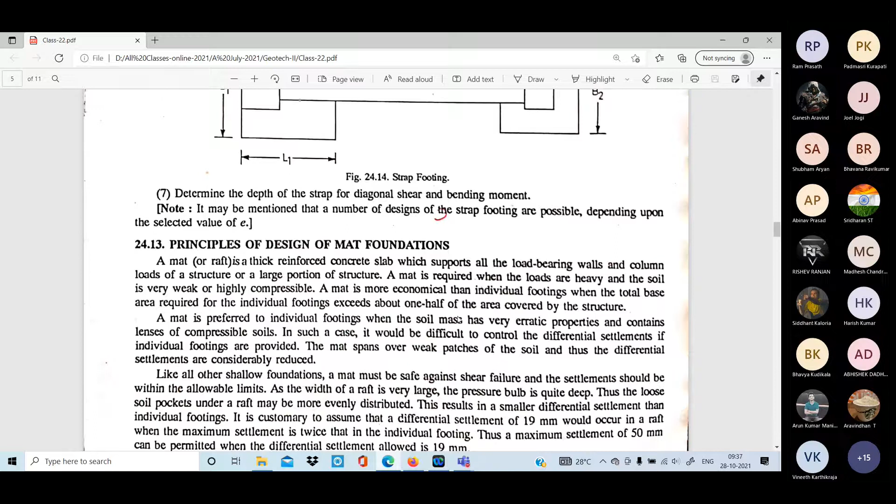So if you recall, we have seen this particular strap footing, where strap would be there. So now we'll focus on mat foundation.

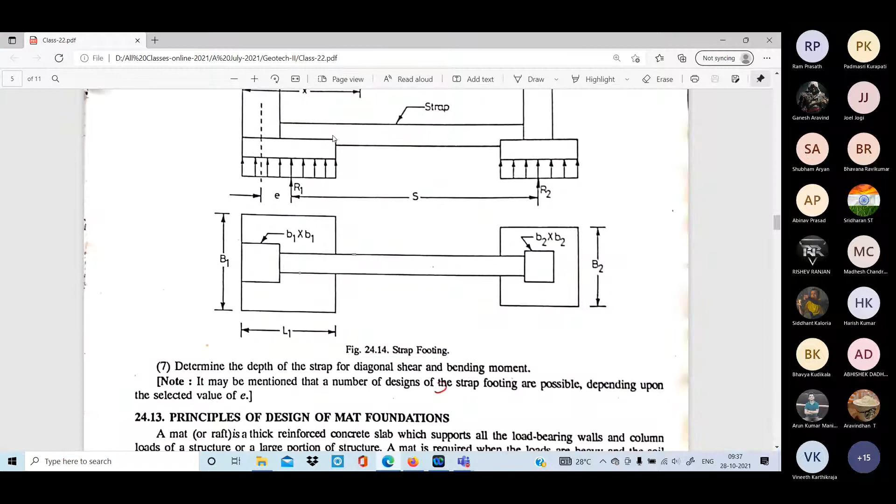Mat foundation actually. So when we have to go for mat foundation, there are some principles given here. I will not read it out, I will tell you what this paragraph is all about.

Generally, raft foundation we will prefer if the soil is soft. But soft up to what depth? If it is a very long depth, then we have to go for pile foundation.

If the soil is soft for a lesser depth, what we'll do is we'll remove that soil fully and we'll fill with the mat. So whatever soil we have removed, the weight of the soil or pressure would be compensated by the raft foundation, the mat what we provide.

So the increase in stress, net increase would be zero only, because what we are doing is we are replacing the soil with the mat. This is the criteria and it is very famous, people have started using it because net stress would be zero at the bottom of this raft.

One more criteria is if you provide individual footings, and the area of the individual footing is more than 50% of the whole area - suppose we have some area, whole area, some 100 meter square - and when you try to provide this footing, if individual footing crosses more than 50% of 100 meter square, then code says it is better instead of providing these footings at a lesser distance, better to go for a full raft foundation.

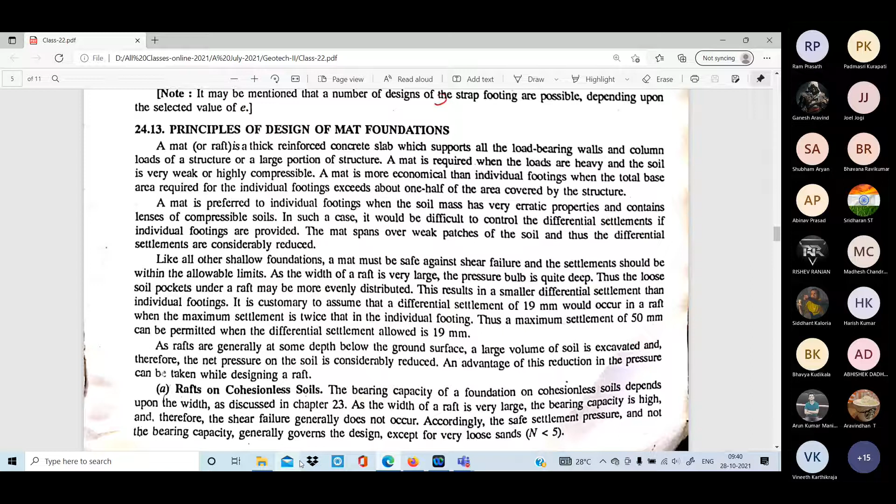That's what is given in this paragraph - what is the raft and other things. Now, like if you see...

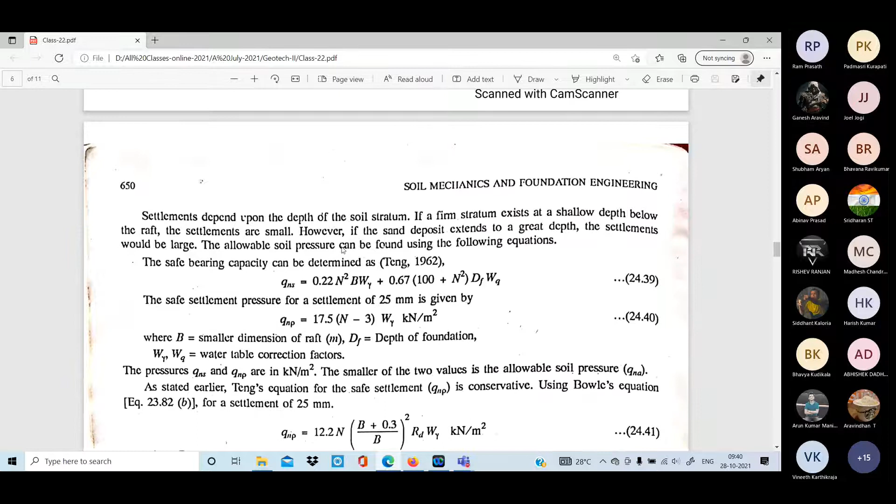How to calculate this particular bearing capacity of raft and other things, that is already like we have seen previously - here also they have given formulas by Terzaghi and many other people. Those formulas are based on the N values.

So as I said, this particular N is very famous - N value, number of blows. Once you get N, there are so many things you can do. We can calculate the bearing capacity, you can calculate the settlement, and many other things. It depends on the C's and other things.

When you do MTech in geotechnical engineering, whatever you are seeing - these people have their own theory, Meyerhof and Terzaghi and other people have theirs, and Bowles, especially Bowles, also a very big scientist.

Now what is the principle if the raft is on a cohesionless soil - the bearing capacity of a foundation on cohesionless soil depends on the width of the foundation. So if you recall our formula, Terzaghi's formula with C, N, gamma, DF and other things, for cohesionless soil this B term would be there. So more is the B, more is the bearing capacity.

Understood? It's just common sense - that means if the width of the foundation is more, you will get more bearing capacity, it will bear more load. This is only for cohesionless soil, not cohesive soil.

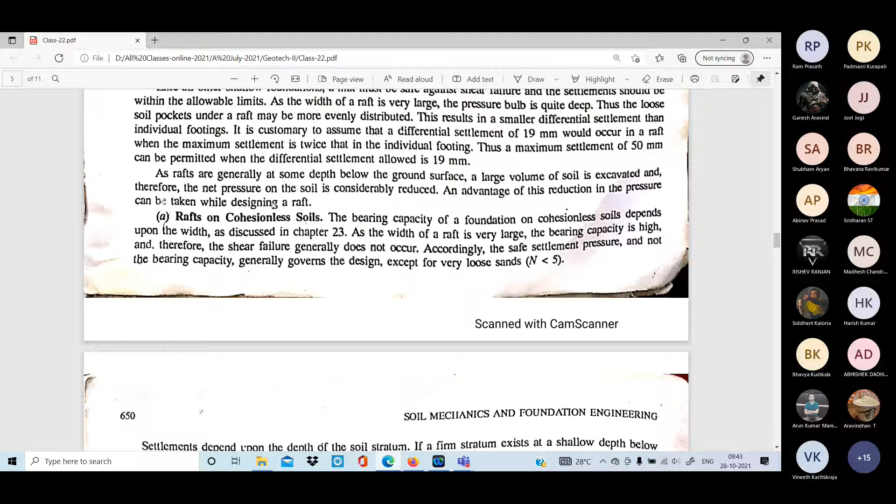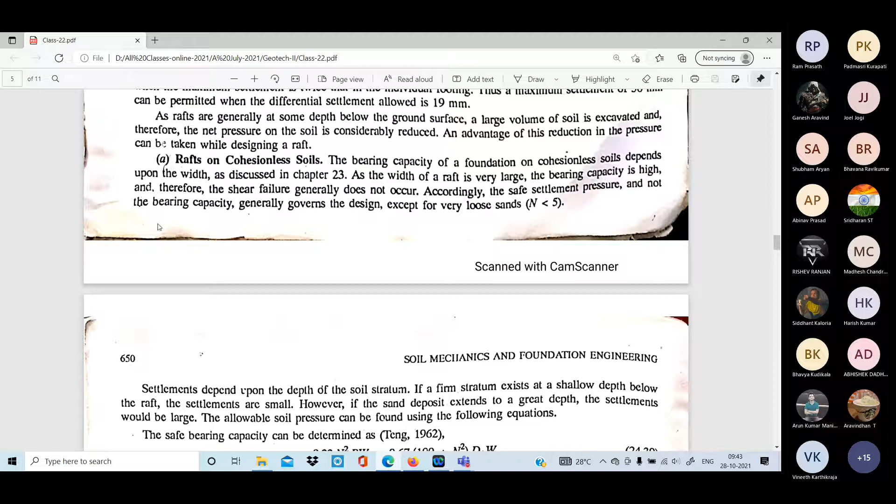Then what is given is, according to the settlement pressure here - I'm showing directly from the book so that you will understand what it actually is.

The safe bearing capacity is determined - this Teng, 1962, has given this formula. Here everything is known: Wgamma, Wq is our water table factor, which we already know. B we know, N we know. So by using this, we can find out the net safe bearing capacity, or the safe settlement pressure for a settlement of 25mm, also can be carried out by this formula: 17.5N minus 3, and so on.

Again, what they have done is - these Wgamma, W, all these are the water table correction factors, which we already know. So here what we are doing is calculating the safe bearing capacity, and also calculating the settlement. Generally we take the lesser value of the two, because sometimes if the soil is settling down, the bearing capacity may be high, but settlement may also be high.

In that case, what we'll do is the pressures QNS and QNP are in kilonewton per meter square. The smaller of the two values is the allowable soil pressure. So the governing criteria for our bearing capacity is one of settlement, one of bearing capacity - the shear failure.

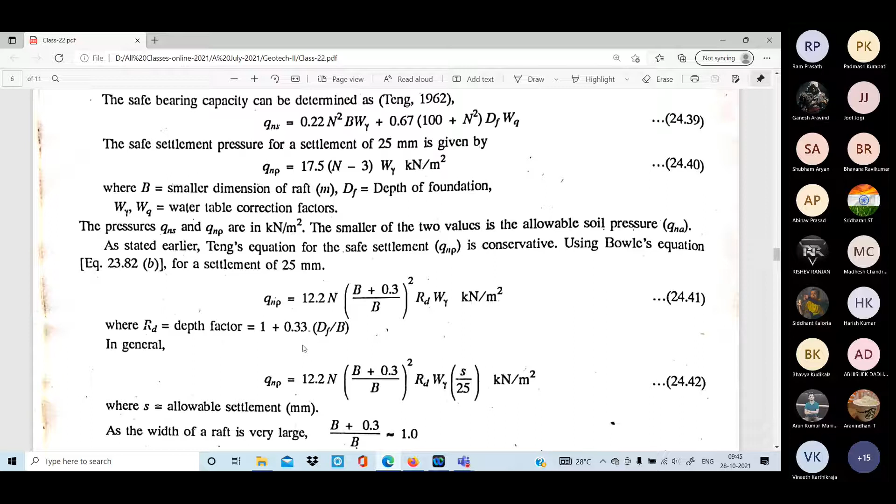Likewise, what we can do is slowly reduce this, and it will become like this. And what it says is, as the width of the raft is very large, because the pressure bulb that forms would be very large, then we say this B plus 0.3 by B term can be equal to 1. I mean, because B by B we can cancel it actually - 0.3 plus 0.3 is there still, but we approximate it as 1.

Then what happens, it reduces to this one. Equation reduces, and for taking RD also given as the depth factor - if you reduce it, suppose RD you take as 1, and S you take as the value of 50mm, then he says it is reduced to this.

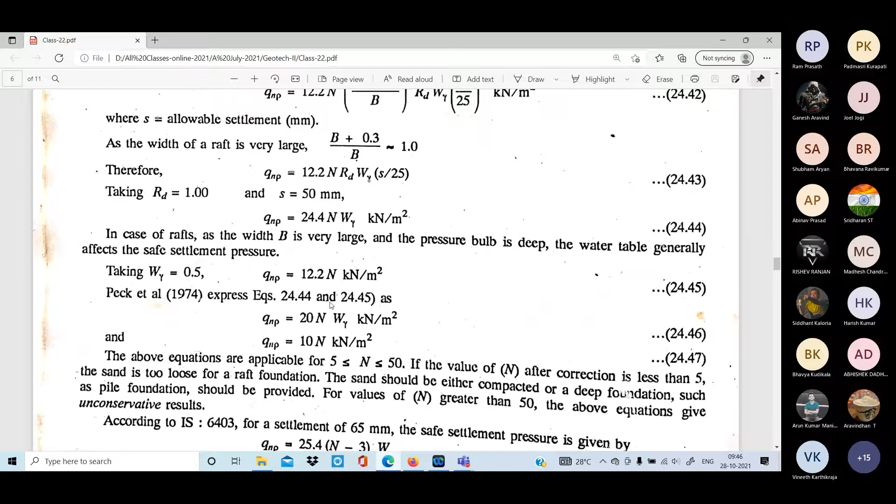So finally what he has done is reduced the equation to QNP, allowable pressure, which is 10N. That means once you know this value N, we can find out the allowable pressure - if N value is 10, multiplied by 10, gives 100 kN per square meter. So what do you say - it is a net allowable pressure.

That means, generally what I'll do is, sometimes when I go to this, if the water table factor is there, okay, this 10. Otherwise, generally what we'll do is if you take the water table factor as 0.5, then this equation becomes like this. And Peck also gave some equations, which equal 20N and water table factor, again 0.5 - if you take the water table factor, it becomes 10. So when I go to consultancy and they ask us to do some SPT tests and all, when I visit, I will just focus on the N values.

Suppose the N value is coming 5, 6, 10 and all, these are loose soil only. If it is getting more than 15, 20 and all, we can easily guess the bearing capacity. The above equations are applicable for N values between 5 and 50. If the value of N after correction is less than 5, the sand is too loose - for a raft foundation, the sand should be compacted or a deep foundation such as pile foundation should be provided. For values of N greater than 50, the above equation gives unconservative results.

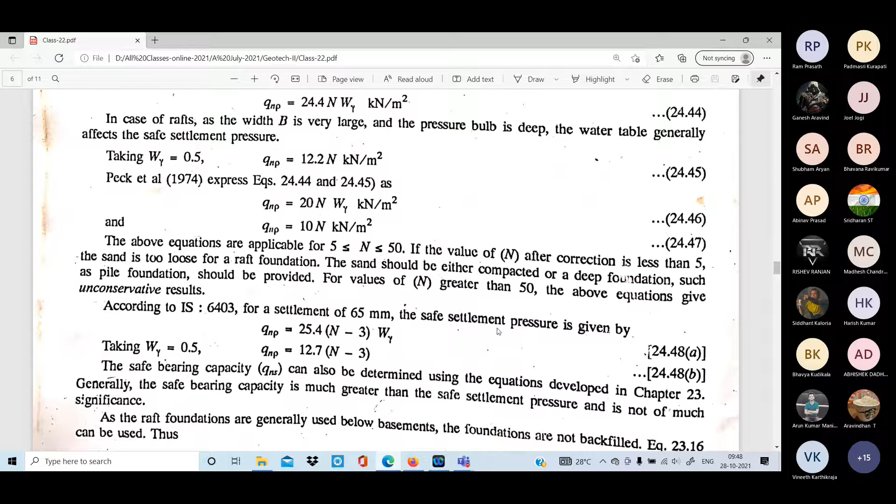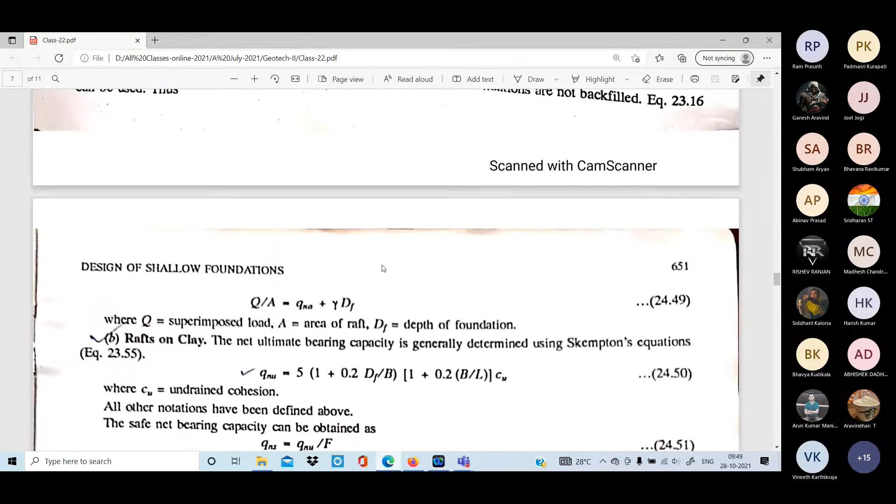What we try to understand here is that everything is converted into N values. In IS code 6403, for different settlements, the values given again depend on the N values. So if you keep on reading, you will get the feel that only N value is sufficient for getting the allowable bearing capacity.

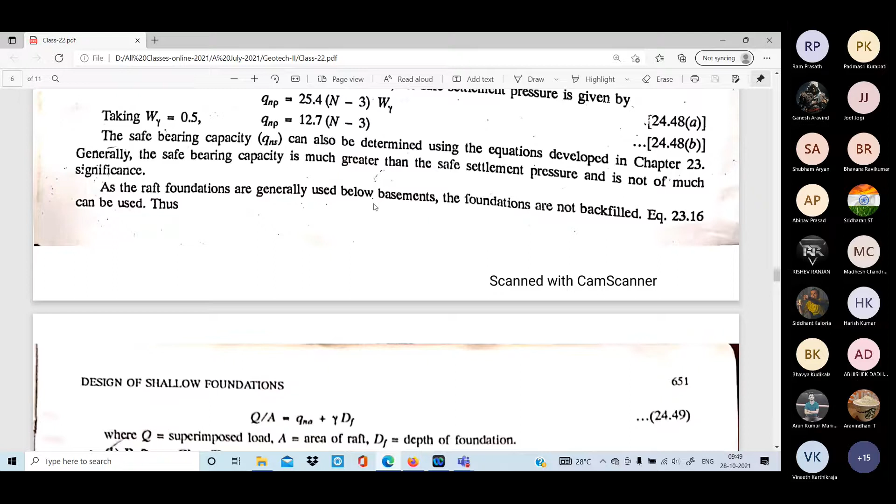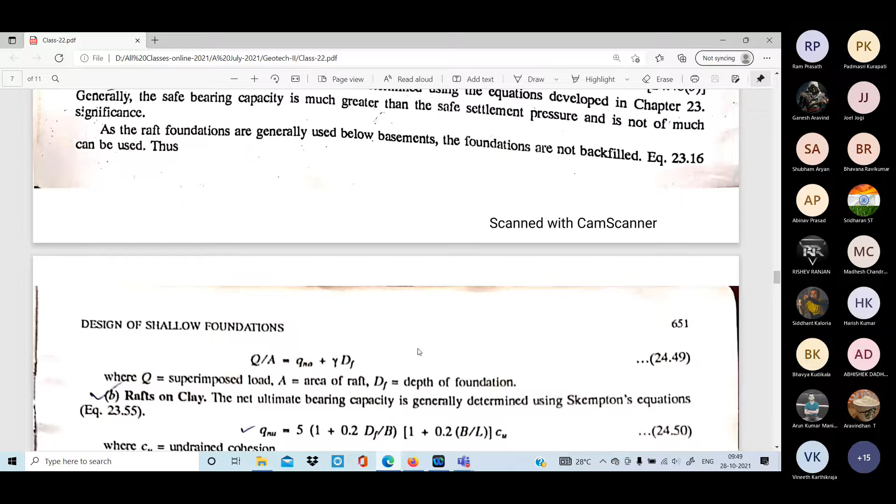One more term is given here. As raft foundations are generally used below basements, the foundation is not backfilled. When it is not backfilled, Q by A equals gamma D plus QNA, where Q is the superimposed load, A is the area, and Df is the depth of the foundation. Now for raft on clay soil, Skempton has given a formula.

Here the Cu term would be there, and the rest of the notations have been defined above. The safe bearing capacity can be obtained - this is the net ultimate he has given. Safe bearing capacity can be obtained by dividing by the factor of safety, which we normally take as 3, but here the IS code says for raft foundation it can be 2.5.

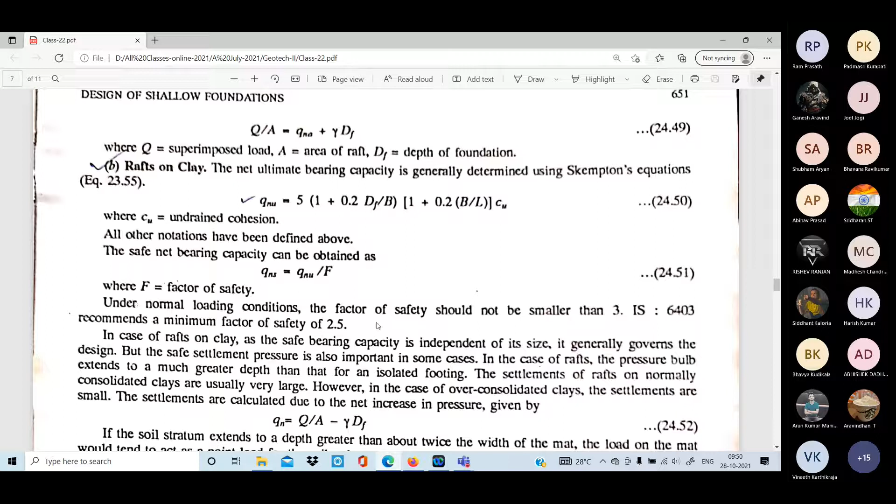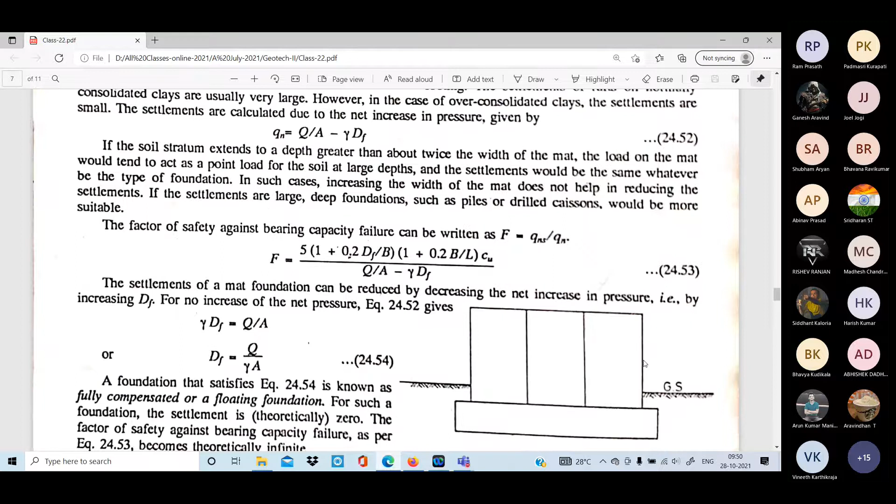So look at this: the settlement is calculated due to the net increasing pressure. This is the net increasing pressure, that means Q by A minus gamma Df can be deducted.

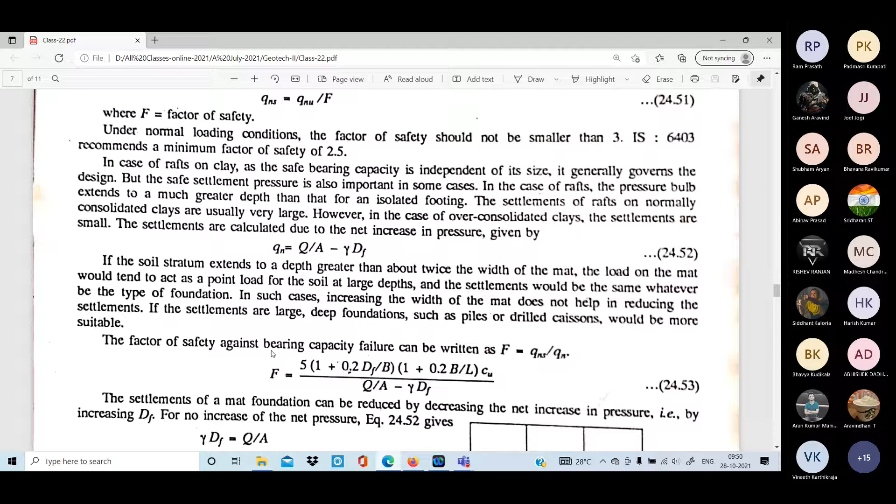So how to find the factor of safety? The factor of safety against failure can be QNS divided by QN - whatever we have written here, the same thing is done, factor of safety is compensated. So gamma Df is equal to Q by A, meaning whatever pressure we are providing through gamma Df would be equal to Q by A, where Q is the superimposed load and A is the area of the raft foundation.

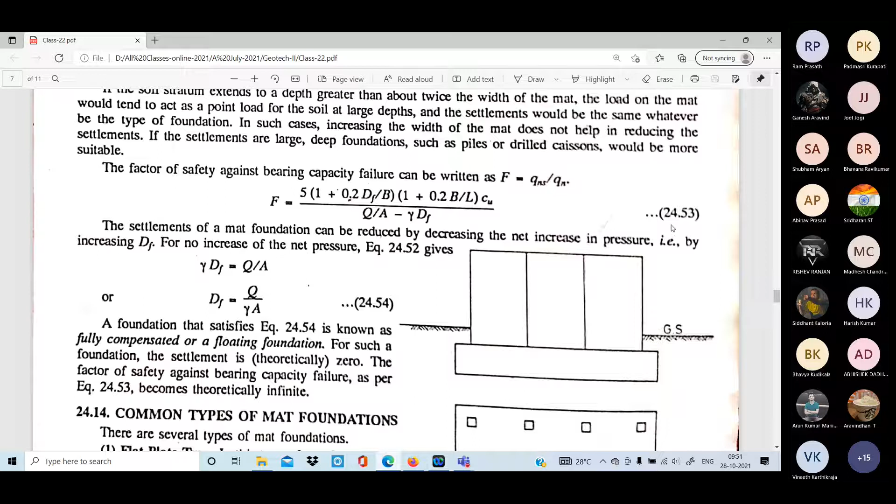So the settlement of a mat foundation can be reduced by decreasing the net increase in pressure. What is the net increase in pressure? It should be 0, there is no net increase. For no increase in the net pressure, the equation is gamma Df equals Q by A, and Df is the depth of foundation we can provide.

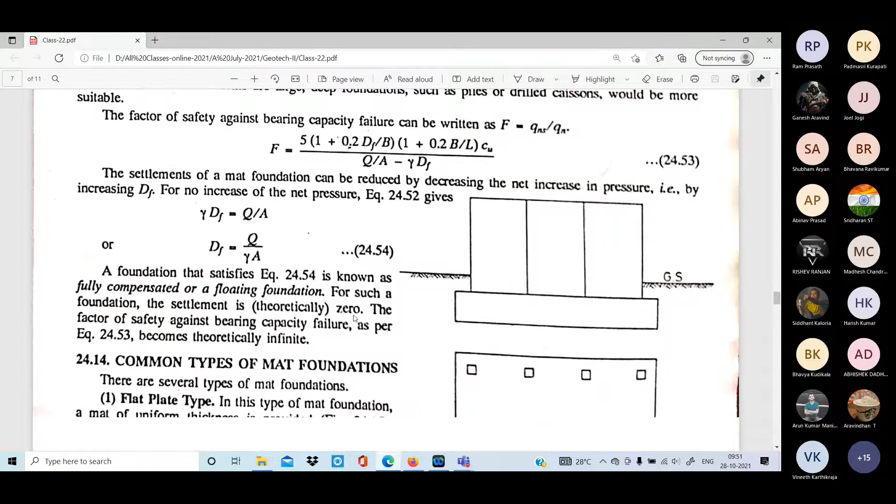This is a very famous foundation, and there are different types of raft shown here. This is the flat raft - it's very important, just have a look. This is the flat type of foundation, that means this is normal. Here we have columns 1, 2, 3, 4, 5, 6, 7, 8, 9, 10, arranged like this, and this is the raft foundation.

What we are doing is providing a fully mat, and from that we take these columns. After the columns we'll have beams, and after beams we'll provide a slab connected to the beams and columns. Likewise we construct a framed structure, then go for brickwork walls. The wall doesn't carry any load, it's used just for partition.

This particular raft foundation - if you see all our major cities nowadays, whether Chennai, Hyderabad or Bangalore, whatever high-rise building you see, it's all rested on a raft foundation because the height of the buildings is 100, 200, 300 meters. So to avoid differential settlement, we go for raft foundations. Many shopping malls in Hyderabad and other places are also rested on raft foundation. And the world's tallest building, Burj Khalifa, is also on a pile raft foundation.

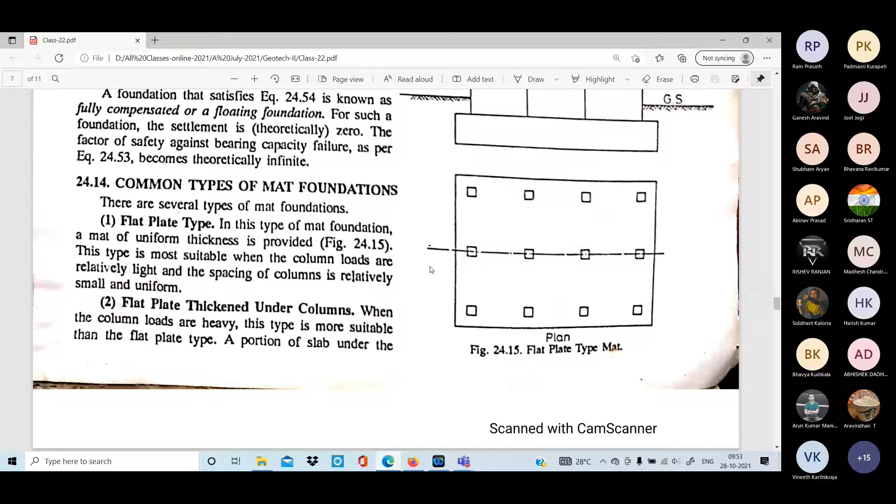Here I will show a picture.

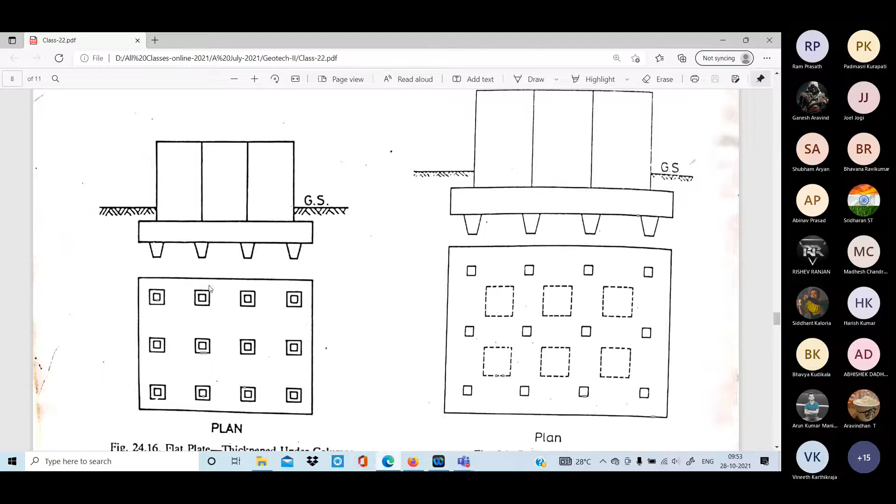The second type is the flat plate thickened under the column. When the column load carries more load, this raft would be thickened around the column. So when the column loads are heavy, this type is more suitable than the flat type.

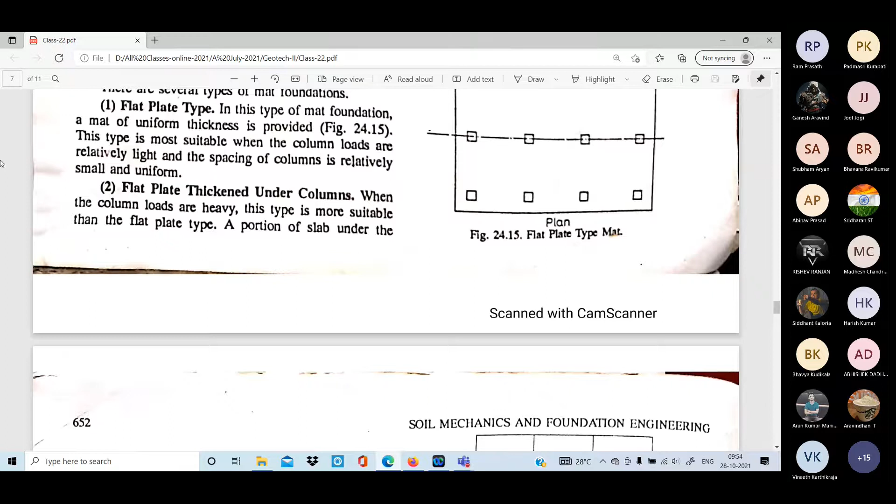A portion of the slab under the column is thickened to provide enough thickness for negative bending moment and diagonal shear. Sometimes instead of thickening the slab, a pedestal is provided under each column above the slab to increase the thickness. So a pedestal can also be provided.

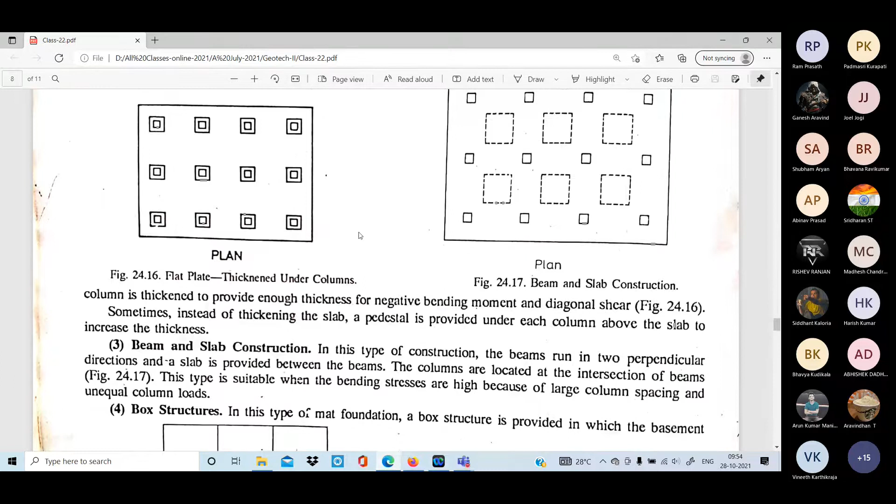Now, beam and slab construction. In this type of construction, the beams run in two perpendicular directions and a slab is provided between the beams. The columns are located at the intersection of the beams. This type of foundation is suitable when the bending stresses are very high because of large column spacing and unequal load. Again, it is a strip kind of footing.

At the bottom we have this slab, the raft, but if the columns are very far apart, it will be connected with beams so that the beams reduce the bending. If all the beams are connected properly, then this column is not going to settle alone. That means everything is connected.

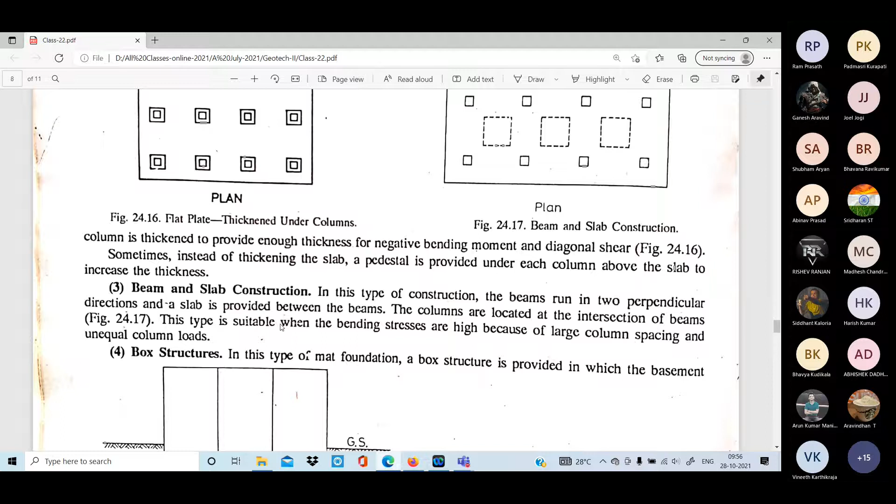So everything is connected, and everything will try to sync together or settle together. There is no possibility of only a single column settling down and causing cracks in the building. If they settle, they will settle all together; if they don't settle, none will settle. So everything is connected here - it is a group of columns connected with the beams and raft. That's the meaning of that.

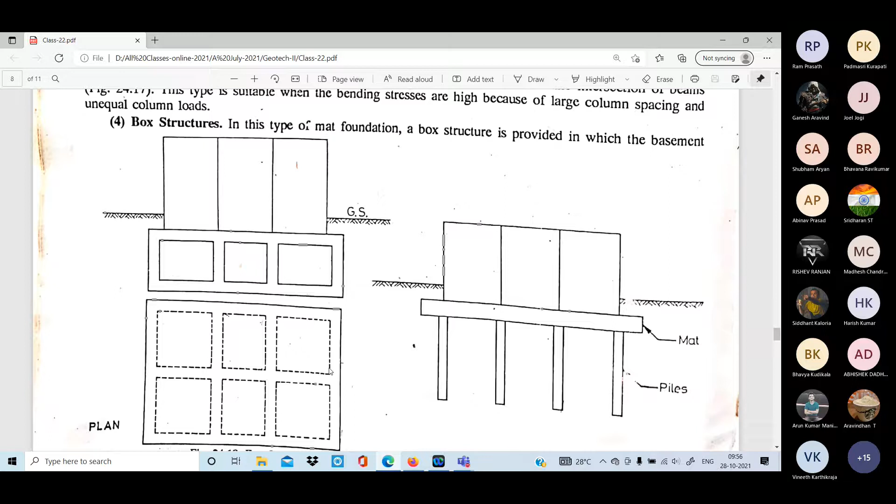Sometimes below this raft, we provide boxes. A lot of research is going on in this area regarding what these boxes are generally for. It is found that for earthquake loading and dynamic loading, these box kind of footings are very helpful because they don't pass the waves through this gap. So dynamic waves, cyclic wave loads, can be reduced.

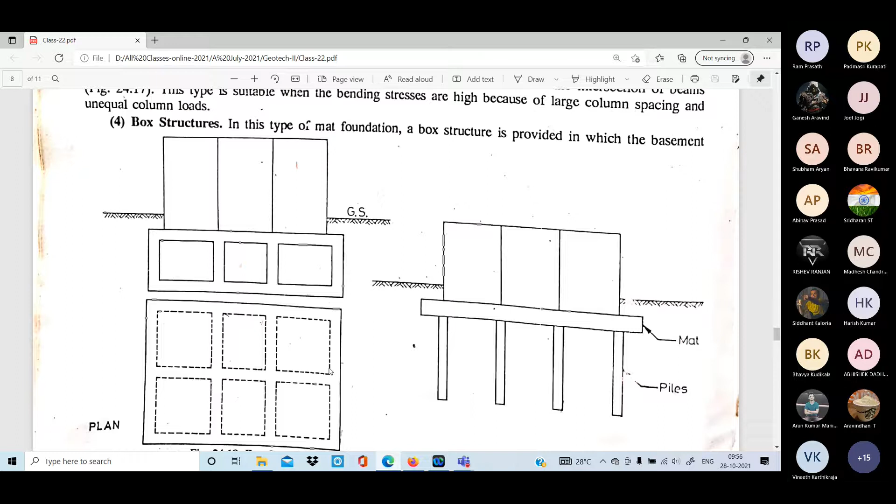So this kind of raft with boxes is very important, and this box structure is provided in the basement which acts as a stiffener for the mat. Boxes can be made of cellular construction or a rigid frame consisting of slabs. This type of mat foundation can resist very high bending stresses, so there will not be much bending stress with that.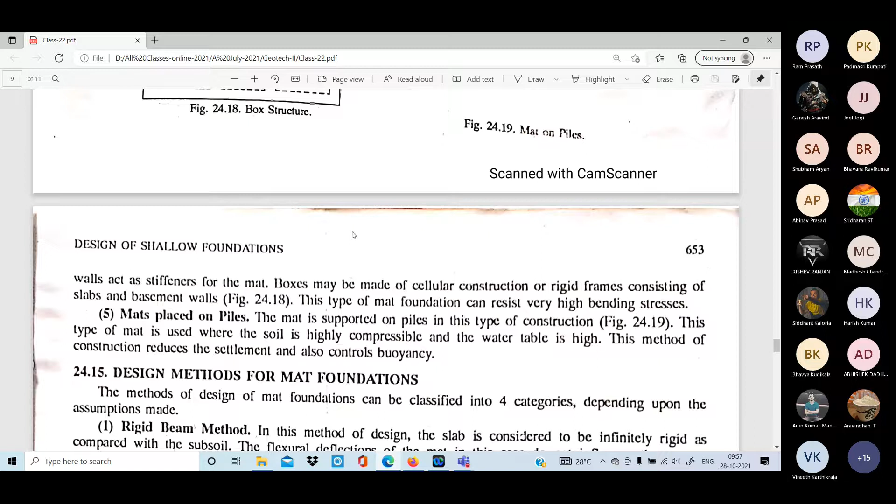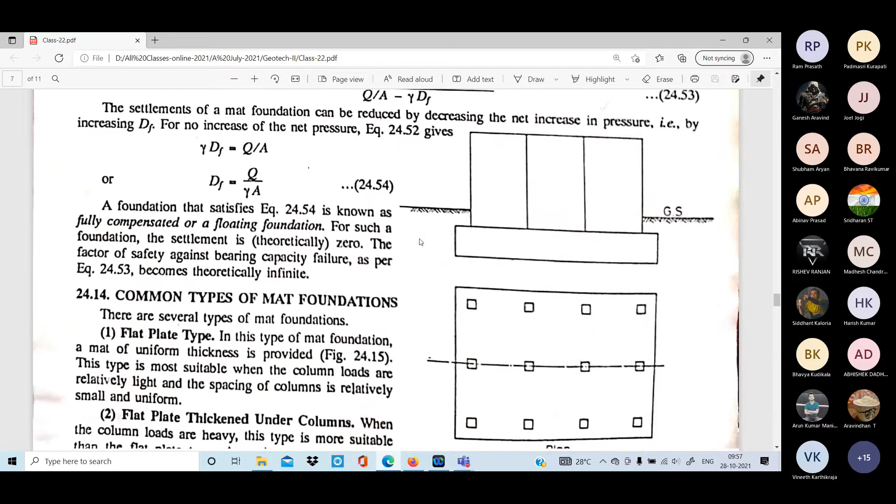And as I was talking about, the Burj Khalifa building - they have provided this raft with piles. Pile foundation, we know that, right? So whatever we are talking about without piles is all shallow foundation with the raft.

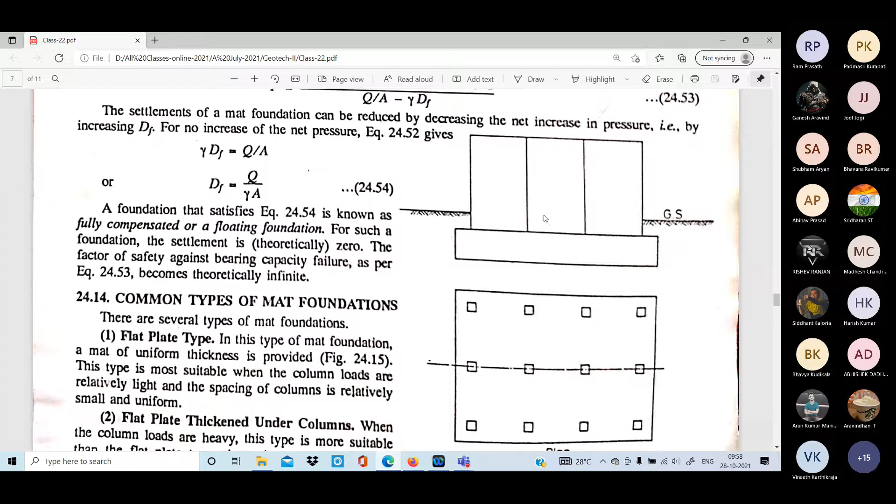But if you don't find any hard strata, like in the Middle East where the soil is very sandy and loose - Burj Khalifa in Dubai, or other Middle East countries like Egypt - the soil is sandy, loose sand, because it's full of desert. In that case, they search for hard strata, but it may be very deep. So they may go for friction piles, and they have so many other techniques to improve the soil. In that case, we go for this particular foundation.

That is the pile, pile plus mat, the raft. Below the raft we will go for a pile foundation also, very deep. If you see the Burj Khalifa's foundation, it is very, very deep. I don't remember how much deep it is, but I was once seeing some video clips showing how this construction happened, and it is really difficult actually.

They take the challenges because it is a very rich country now. They have a lot of money, so they can take a risk, and they want to build and show to the world that they can build this highest building. So that's how they take challenges.

And who are working there in the Middle East? Our Indians only, mostly Indians or Europeans, because these local people may not have that much knowledge about all these things. So they hire us, they pay more for us, and we'll go there and work. So likewise, architecture, the soil, pile foundation, and the people involved, these are known people, from Indians. That's how we are constructing the pile foundation.

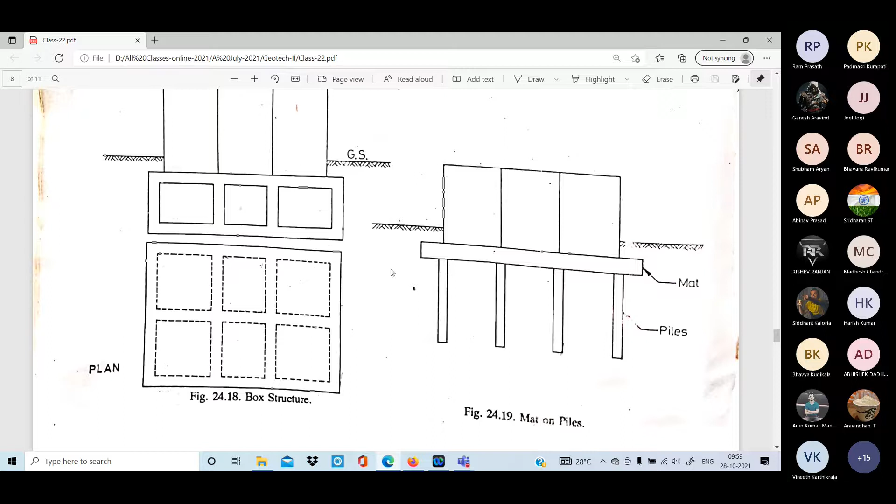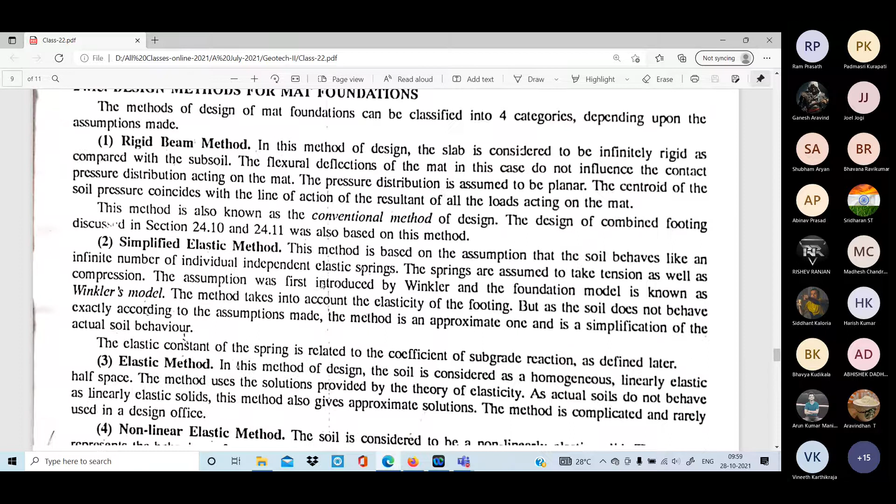There are methods for how to design it also, in general. One is the rigid beam method, the simplified elastic method, and the non-linear elastic method. You will study these methods when you do MTech in soil mechanics. The rigid beam method is simple, that's what is given in your book.

In this method of design, the slab is considered as infinitely rigid compared with the soil. So the flexural deflection of the mat in this case does not influence the contact pressure.

One more method is the simplified elastic method. In the elastic method, what generally happens is you read it. I'm telling you this because I did my MTech in geotech. What we do is we consider the soil as a spring at the bottom, and we calibrate the stiffness of the spring and use Winkler's model. Winkler's model is very famous. What he says is the soil will act as a spring, and he converts that mechanics into mathematical form, solves those equations, and gives the design.

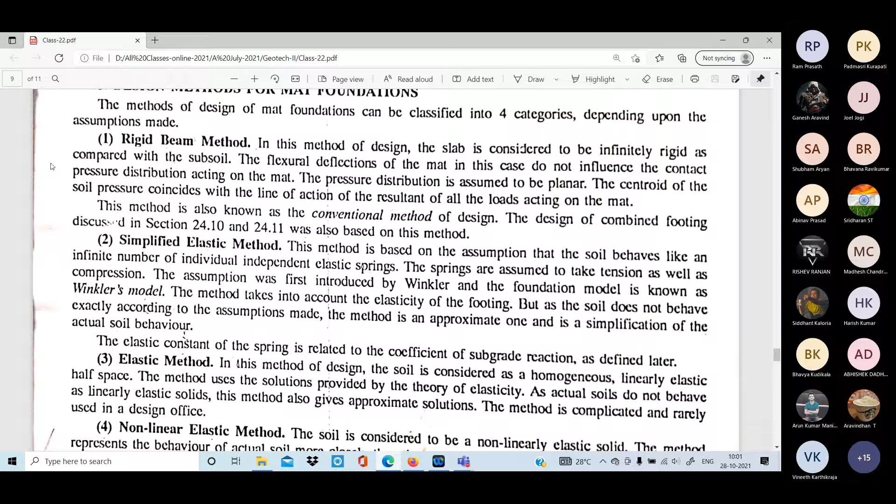So likewise, there are so many methods. And for the finite element method, we can use software like Plaxis 2D, 3D, and many others like FLAC 3D. Many soil mechanics software are available. We can use those softwares and design it actually.

That is the non-linear elastic method. The elastic method, you know that. In this method of design, soil is considered as elastic, a linearly elastic half-space. The method uses the solution provided by the theory of elasticity. The actual soil does not behave like elastic because we assume certain things, that the soil is elastic. Elastic in the sense, when you remove the force from the soil, it will come back to its original position. Will it come back to original position? It won't, because soil is not elastic, it is plastic.

So we assume that in that particular method and we design a raft foundation. Non-linear method means we assume that soil is not linear, that means not elastic. In this case, we have so many methods like finite element, numerical methods. This method represents the actual behavior of the soil, using numerical techniques such as the finite element method, FEM.

Are you studying FEM? No sir. Do you have FEM in your final year? Elective or something? You may be having finite element method. It's very interesting, you can read that particular subject.

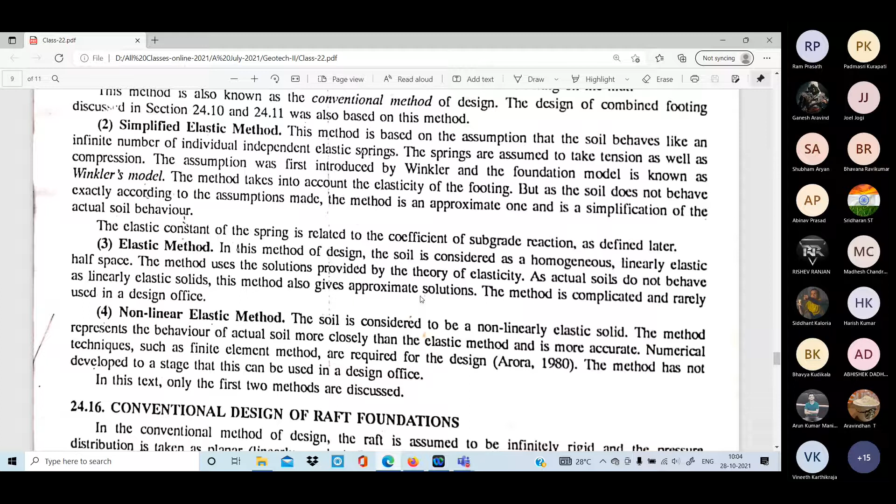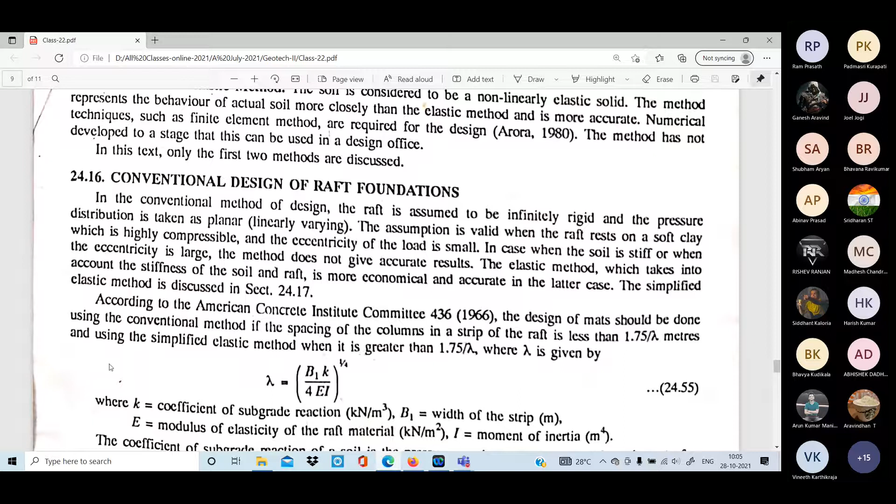So here conventional design is given for a raft foundation. According to the American Concrete Institute, the design of a mat foundation should be done using the conventional method. In this book, they have not given this one, only one is given, and for undergraduate level this is more than enough to understand raft and all.

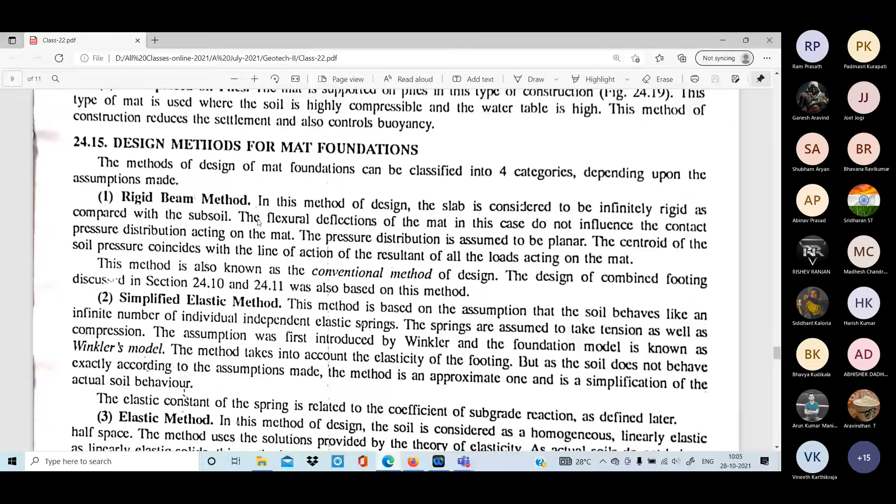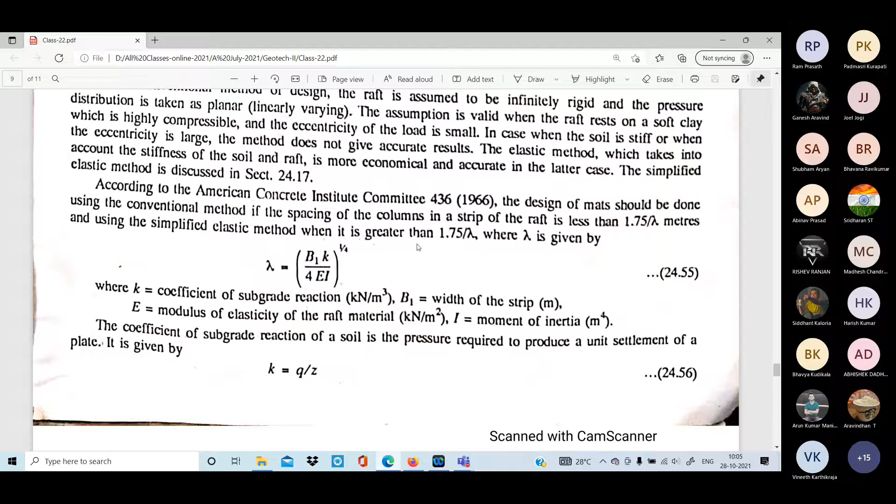So here, if you see, the design of mat foundation should be done using the conventional method if the spacing of the columns in a strip of the raft is less than 1.75 by lambda meters, using the simplified elastic method when it is greater than that, where lambda is also given. So here conventional methods are given; if it is more than 1.75 we use the simplified elastic method. This lambda is given, what is lambda, what is b1, k, all these things also given here, q by z and so on.

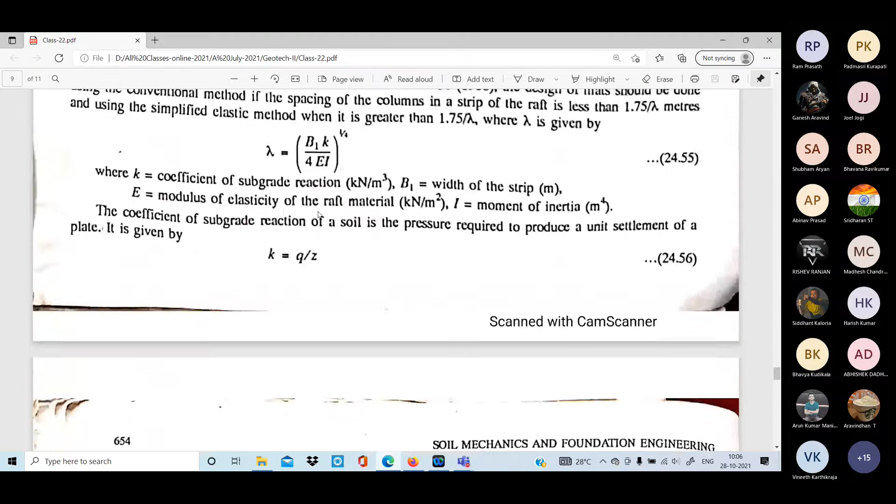And if you see here, engineering mechanics is very important here. Whatever load you are getting should pass through the center of gravity of this raft. That means we have 9 columns. Whatever load is acting on these 9 columns, when you try to calculate taking the bending moment, like what we do in engineering mechanics to calculate the center of gravity, if it does not pass through the center of gravity of this raft or whole building, then you will see eccentricity.

In that case, what generally we do, there is a procedure given. First procedure, we quickly follow one by one: 1, 2, 3, 4, 5, 6, 7. Once we see the numerical, you will understand actually. It may be a little confusing and may not give you hope on how to design a foundation. But in the next class, there are some solved problems given in the book. When you look at those solved problems, we will understand how generally we design a foundation.

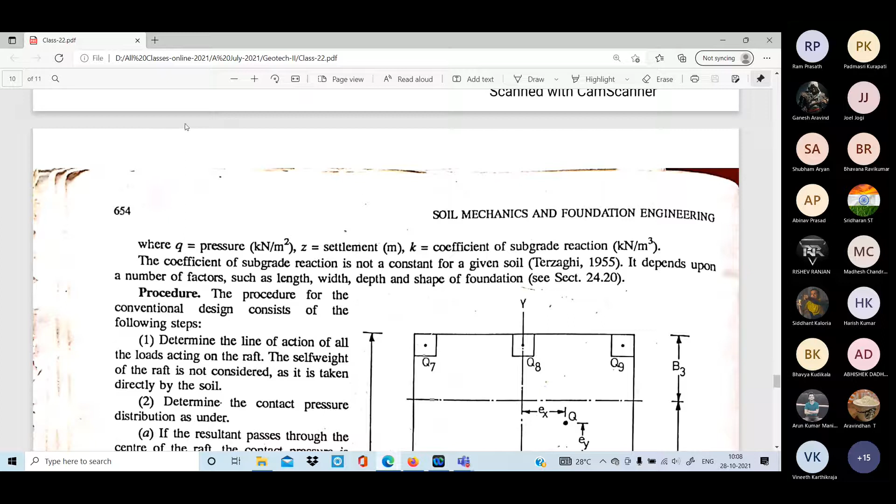So the only thing is you should be thorough with your RCC, because here we are not discussing anything about reinforcement, how to provide, how much and all. So what we'll do is we'll give a length and depth and all, and we'll ask you to find out the shear, bending, and find out the reinforcement by using your RCC knowledge. That's how it is given, because this book has been limited, otherwise it would become an RCC book. So we'll just focus on the bearing capacity only here.

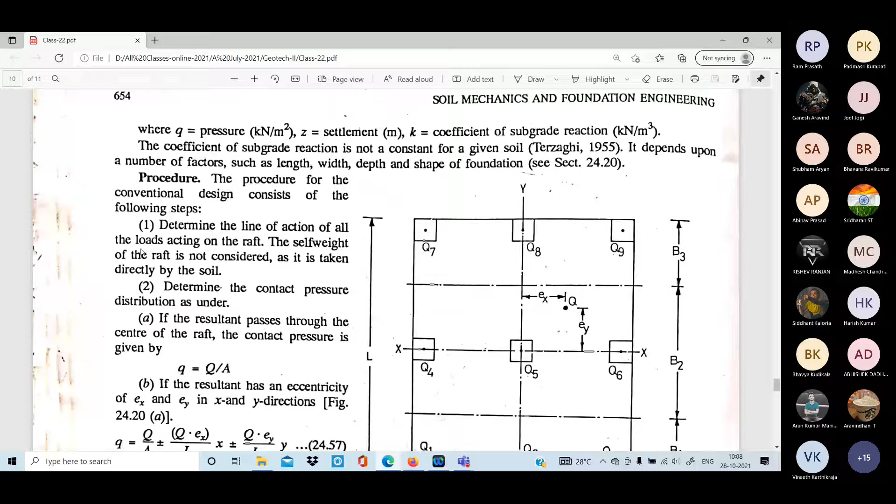So first determine the line of action of the load acting on the raft. The self weight of the raft is not considered; it is taken directly by the soil.

First determine the line of action, then determine the contact pressure distribution. If the resultant passes through the center of the raft, the contact pressure is equal to Q by A, that is load divided by area of the raft.

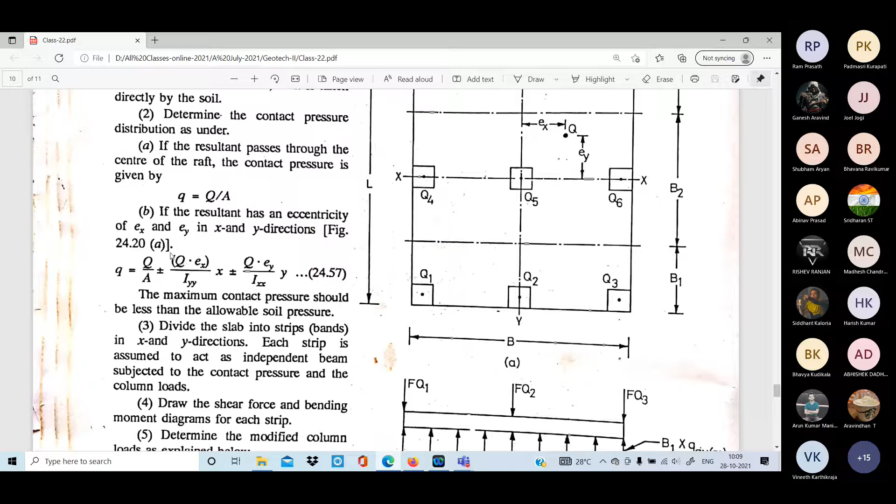Suppose it does not pass through the center, then we take the help of eccentricities EX and EY. If the resultant has an eccentricity, we use the moment formula, like M by I, and apply M as plus or minus.

Once you find the contact pressure, the maximum contact pressure should be less than the allowable soil pressure.

So divide this slab into strips. Here's a very interesting thing: the full raft is divided into strips, B1, B2, B3. We are simplifying it instead of taking the whole raft as one unit.

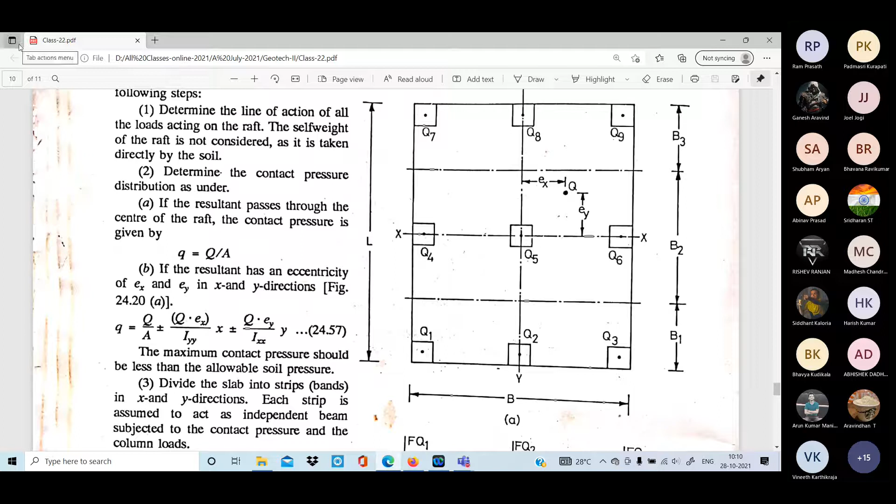Divide the slab into strips, bands in X and Y direction. Each strip is assumed to act as an independent beam subject to the contact pressure and the column load. So we have again brought it to beam design, dividing into strips.

Look at the second picture: these are the column loads, and this is the contact pressure on a beam. This is very easy to design, and we can easily find the shear force, bending moment and other things for the full raft foundation.

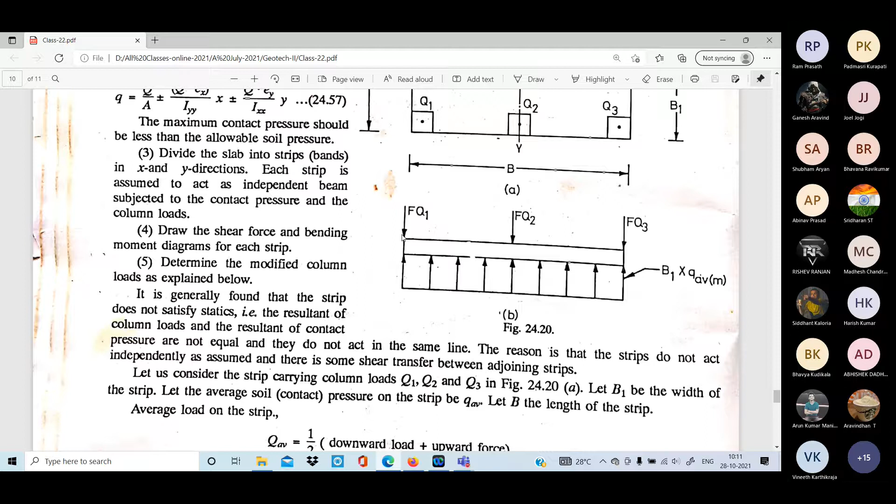Draw the shear force and bending moment diagram. Then determine the modified column, that means the actual column, as explained below, showing how to find the average.

Consider strips of Q1, Q2, Q3, where B1 is the width of the strip, and let us find the average contact pressure such that downward equals upward.

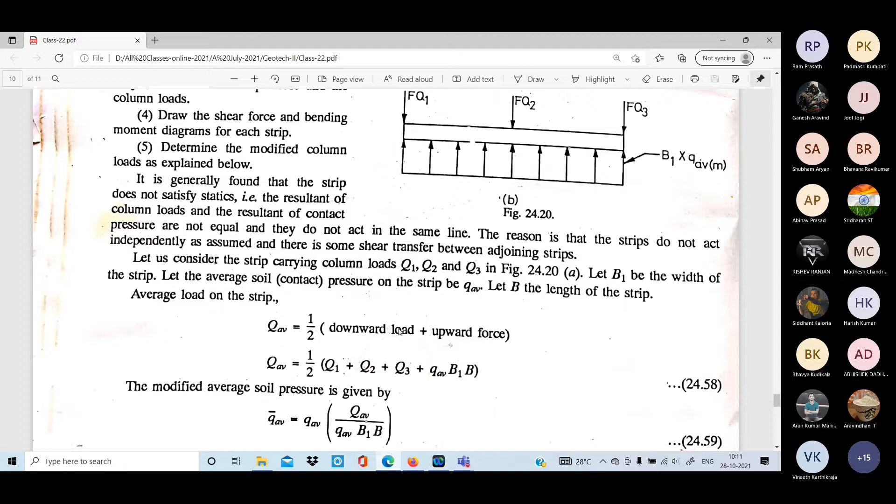So we can design this whole strip raft foundation by making a small strip with the load acting on it. Once you know the soil pressure, we take it as a UDL load. You can reverse it also.

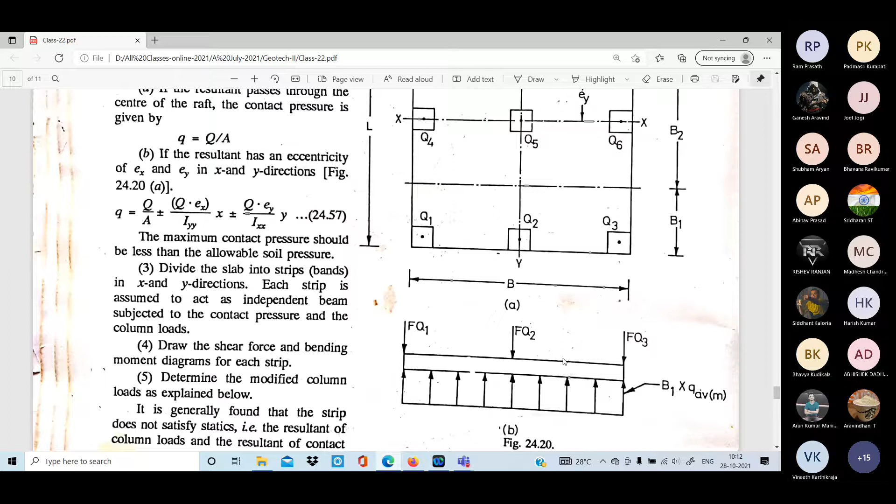What happens if we reverse it? This particular beam is resting on three columns or point loads, passing through the UDL. We know how to draw the shear force and bending moment diagram for a UDL, and from the maximum bending moment we get an idea of how much reinforcement to provide and where to provide it to resist.

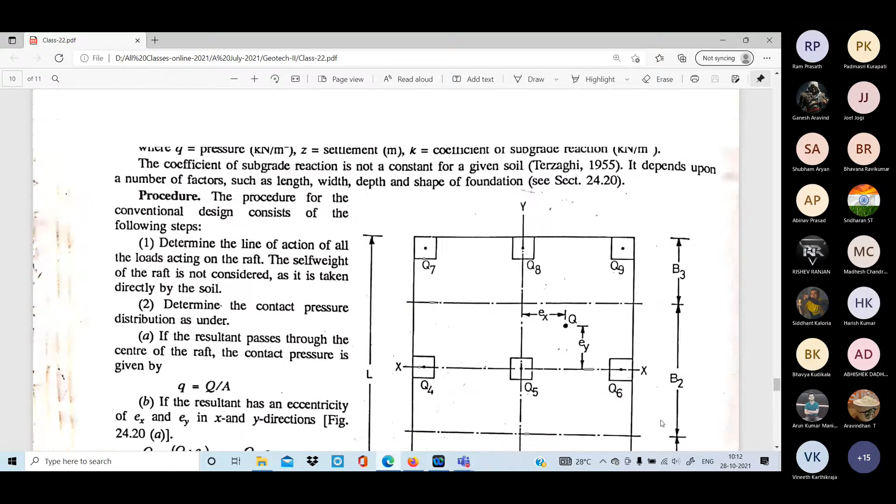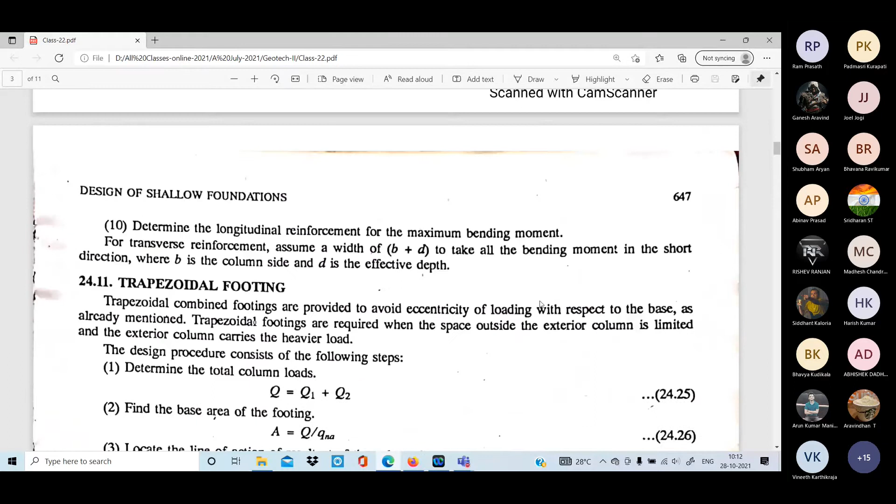So this is all what we see here: finally we are trying to make it into beams. We've seen the footing, and we are converting it into beams only, so we can design this whole foundation.

Once you see this solved problem, you will understand. Once you see a solved problem, you get confidence that yes, we can design a footing easily. So read it once; it's not very difficult, try to understand it.

One reading is more than enough, because some people give direct formulas like Terzaghi, Skempton, Meyerhof or Bowles. They give direct formulas because they are so confident on the N values, since everything is related to N values only.

Once you have n values, that's what we do in the consultancy work. If they ask us to come and investigate, recently we have done this for our Trichy airport. There is an extension happening to Trichy airport, and they called for soil testing.

So what we've done is, first, soil testing means finding the SPT value. Once you know SPT, we bring the soil sample from the field, classify the soil, and determine which zone it falls into. Based on that, if it's gravelly sandy soil, you'll definitely get a very good n value, and from that we can use some equations.

IS code has given an equation, and Bowles has given one too. We can find out the bearing capacity, and once you know the bearing capacity, it tells us what kind of foundation we have to go with.